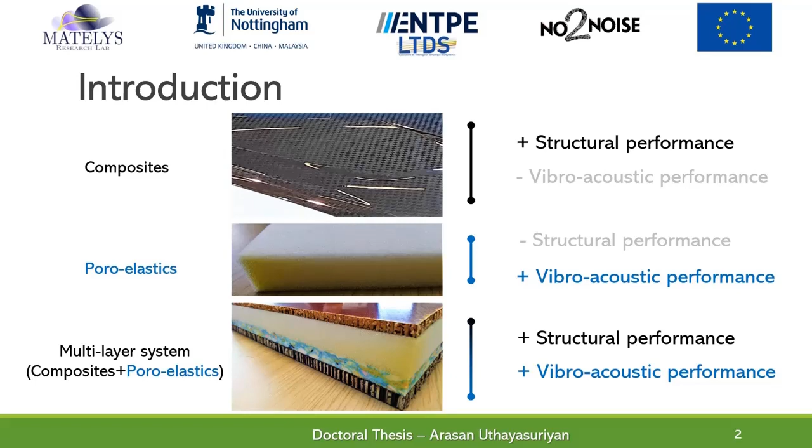By combining these two kinds of materials, we form a multi-layer structure from which we could realize good performance on both aspects. To analyze these multi-layer structures, many types of vibroacoustic models are used, and one such type is called equivalent or condensed plate models, which is the topic of my doctoral research. We will see what these equivalent plate models are and why we use them, what basic details we should know to understand them, what exactly we get from these models, and what process or methodology we follow to get these outputs. That's the first part of this presentation, and after that I'll move on to the four advancements I made during the course of my PhD.

First we'll focus on what these equivalent plate models are and why we use them. To answer these questions, we could look at two important advantages that they provide. Let's look at the first one.

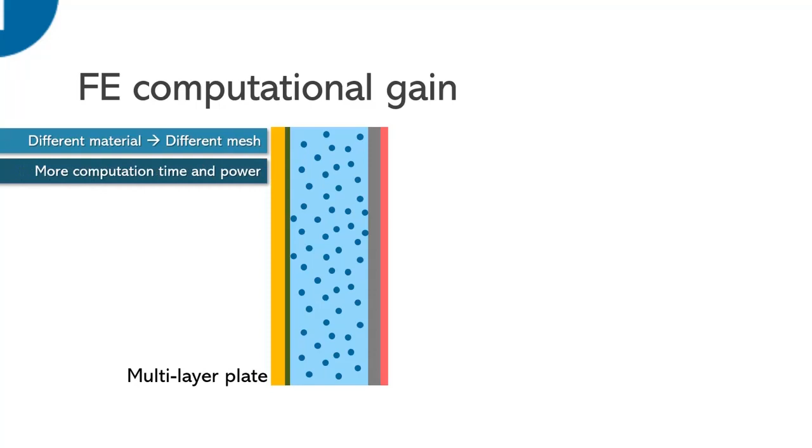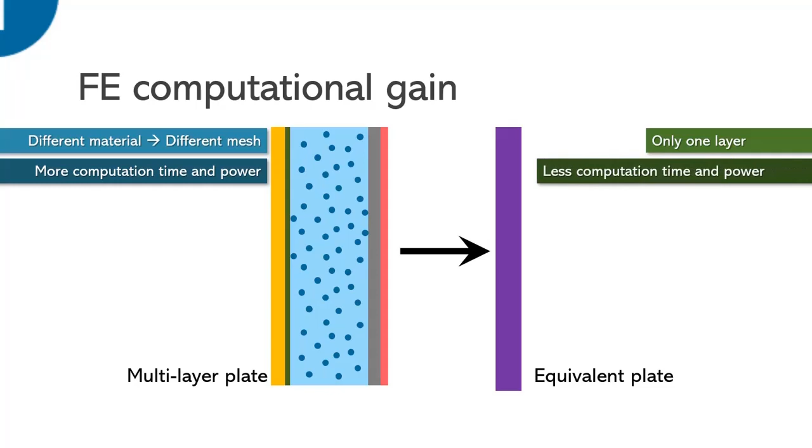We have seen that these multi-layer structures are used to improve structural and vibroacoustic performance, but when we go for finite element computations of these structures, we need different mesh sizes or mesh types suitable for different materials used in the layered structures. Additionally, for an industrial problem like cabin flooring design of an aircraft, if we mesh each and every layer of these structures, it would result in a larger number of degrees of freedom, requiring more computational time and power. Alternatively, if we could convert this multi-layer system into a single layer which would exhibit the same or equivalent vibroacoustic response, we would end up with only one layer of material to handle, helping reduce the total computational time and power for finite element simulations.

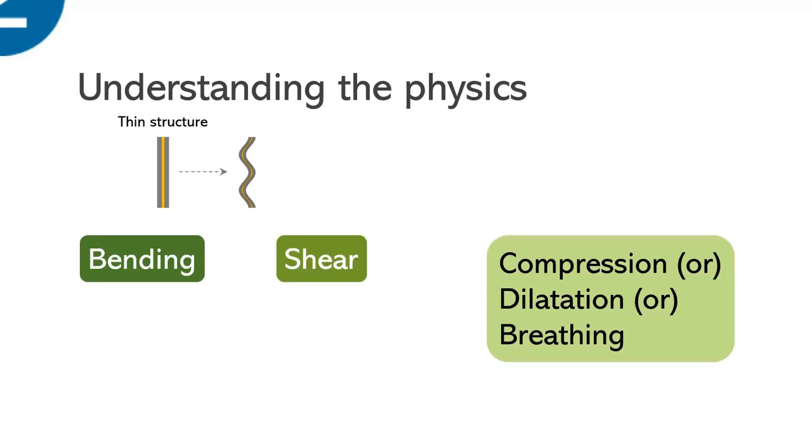Now let's look at another major advantage of these models. Depending on the types of layers used in the multi-layer structures, different kinds of waves could propagate inside the layer, which then contribute to the global response of the structure. If the layers are too thin, we observe that only bending and shear contribute to the global response of the system, and generally these two wave motions are categorized as antisymmetric wave types. On the other hand, if the multi-layer structure is thicker or contains soft materials inside, then along with bending and shear, compressional motion also influences the response of the multi-layer structure.

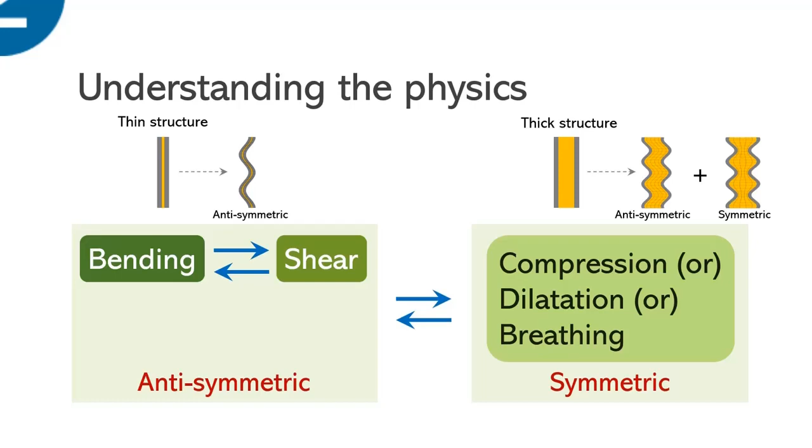Here, the equivalent plate models help us understand the interaction between antisymmetric motions such as bending and shear. For example, at a given frequency, how is this multi-layer structure going to behave? Is it controlled by the bending of all the layers or only some layers, or how do these different motions affect the damping nature of the structure? What are the interactions between the symmetric and antisymmetric motions, and when are they important? This kind of understanding could be obtained from these equivalent plate models, and this information is quite useful while designing multi-layer structures.

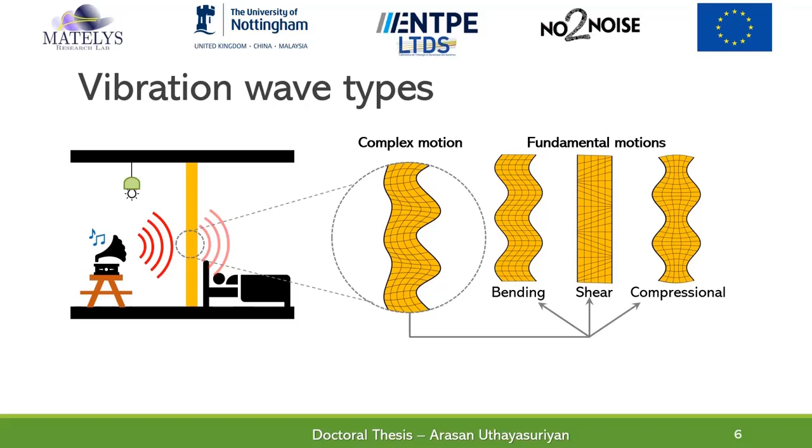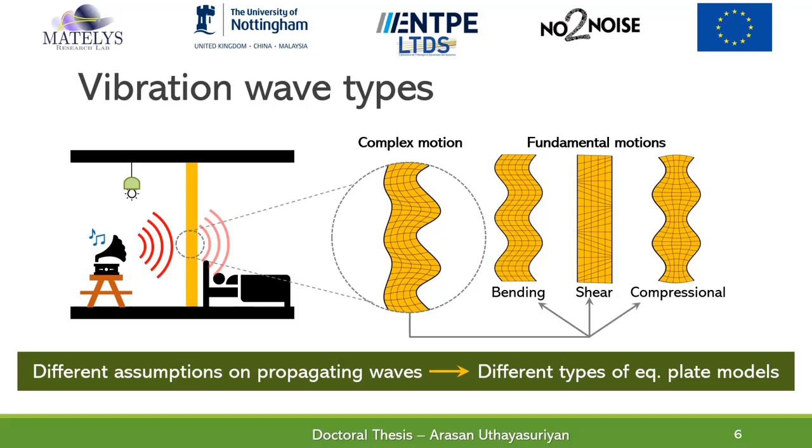There are different equivalent plate models in the literature, but they mainly differ from each other by what propagating waves they allow in each layer of the multilayer system. Why do they allow only a few wave types and not all? It is mainly to reduce the complexity level of the theoretical formulation of the model, thereby targeting only specific problems. So by formulating these equivalent plate models, what do we get as an output?

For this, we will look at three models that are widely used in the literature and industries. In the added stiffness model, only bending wave motion is considered in all the layers of the multilayer system. In another popular model called RKU, developed for three-layer systems, the outer layers are assumed to be controlled only by bending, and the core layer is controlled only by shear.

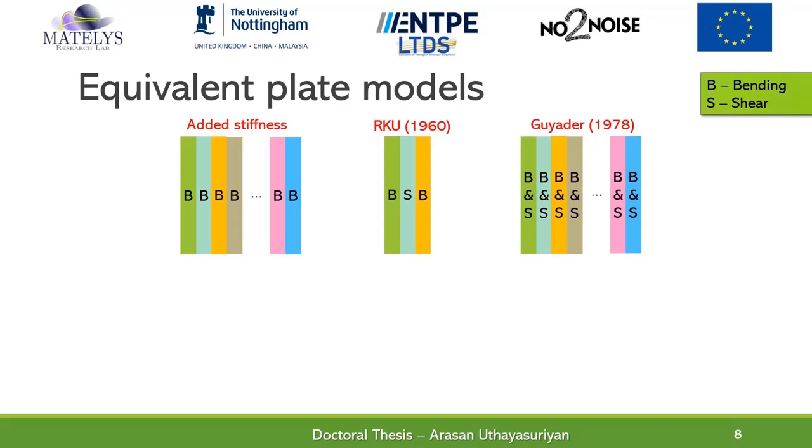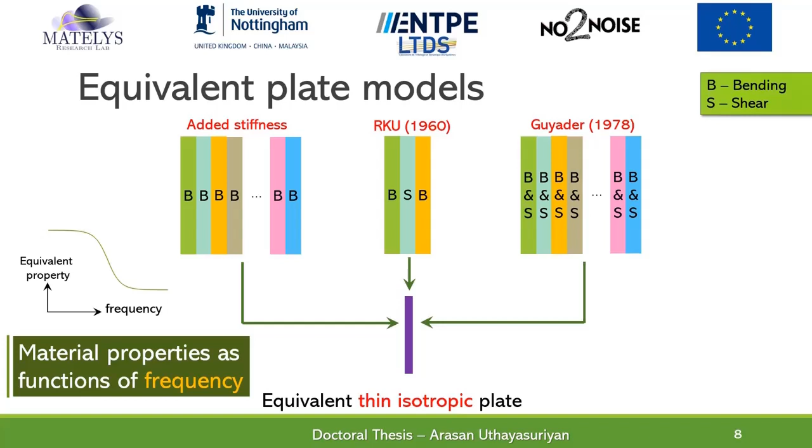The third model, developed by Guyader, allows both bending and shear waves in all the layers of the multilayer structures. All these models convert the multilayer structure into a single isotropic thin plate with frequency dependent material properties such as bending stiffness or Young's modulus, which are given as inputs for finite element calculations. Note that these models exhibit only bending and shear effects of the multilayer structures, and neither includes compressional or dilatational motion in their formulation.

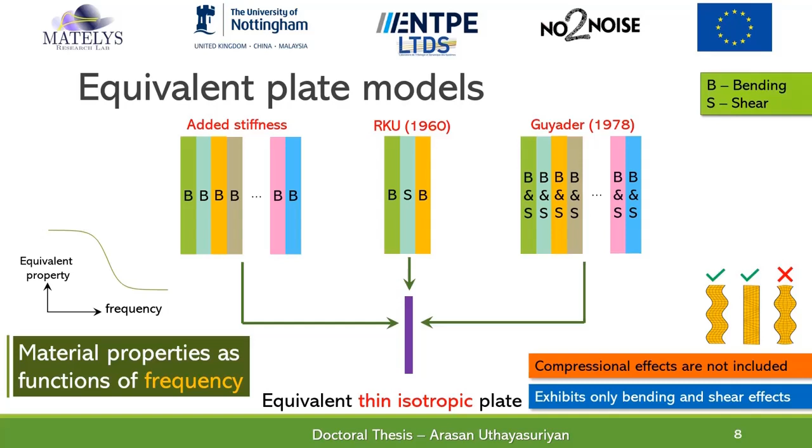Knowing these basics of equivalent or condensed plate models, I now move on to advancements done to improve them. The first is to find the frequency limits of validity of commonly used plate models for vibroacoustic applications. Two types of plate models are commonly used: Love-Kirchhoff and Reissner-Mindlin theories, commonly referred to as thin and thick plate theories, respectively.

Finding these frequency limits of respective theories would be necessary to safely apply them, but there is no clear-cut analytical expression available in the literature which could help us know their validity or accuracy limits. Therefore, as a first advancement, the frequency limits of isotropic single-layer plates are analytically expressed.

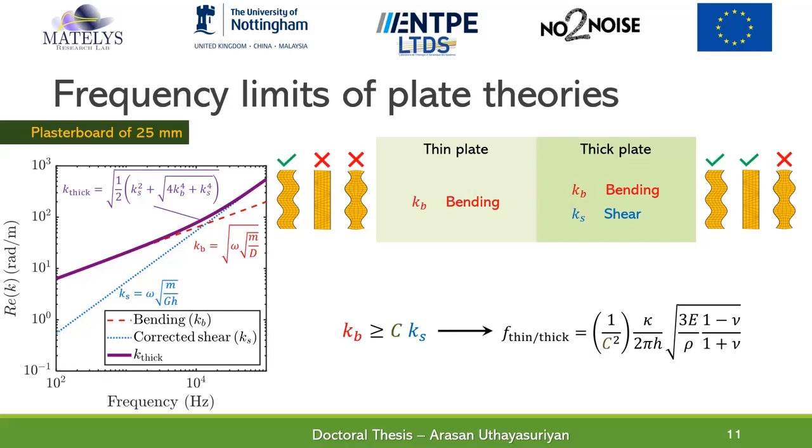As the shear wave number is comparatively lower than the bending wave number in the low frequency range and increases linearly with frequency, we could limit the thin plate theory by defining a ratio C between the bending and shear wave numbers, as shown here. This definition helps us find the analytical expression for the frequency limit of thin plate theory.

For the frequency limits of a thick plate theory, we could compare the propagating waves of a thick plate and an elastic solid.

Note that the principles of elasticity include the compressional motion of the structure along with bending and shear, whereas the plate theories neglect the compressional motion.

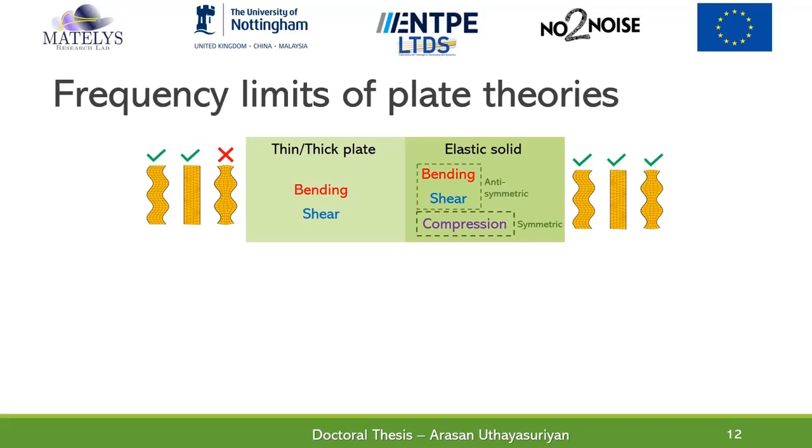For asymmetric multilayers, these expressions would be complex, and those are out of the scope of my thesis.

which actually comes from the transfer matrix method. And from this equation, we could obtain the symmetric admittance of an elastic layer.

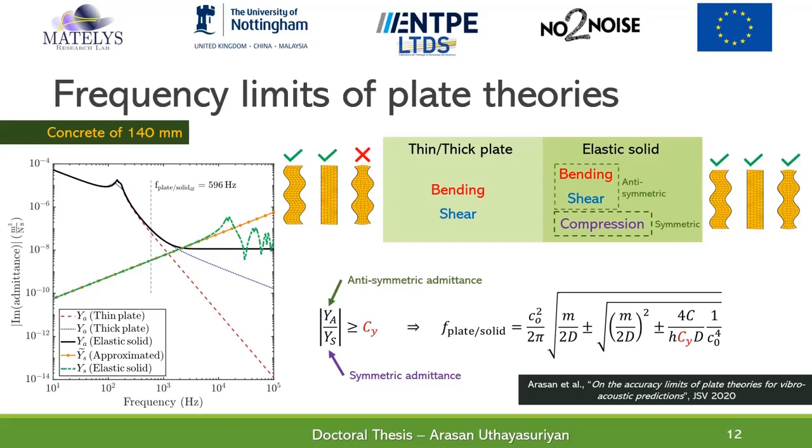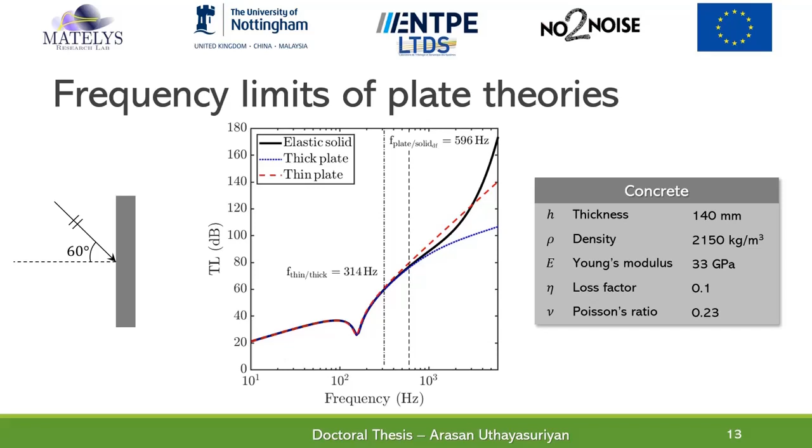So now if we plot the transmission loss for a concrete layer with the mentioned properties, we could observe the well-predictive nature of the frequency limits computed by the analytical expressions that I have shown before.

So to demonstrate the validity of these frequency limits, a dedicated web page has been created in the APMR website. You could find the link for this page in the description of this YouTube video. The web page contains the details that we discussed now.

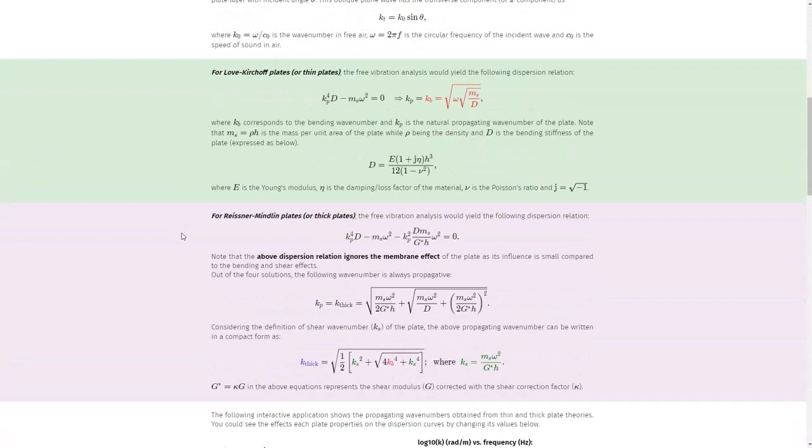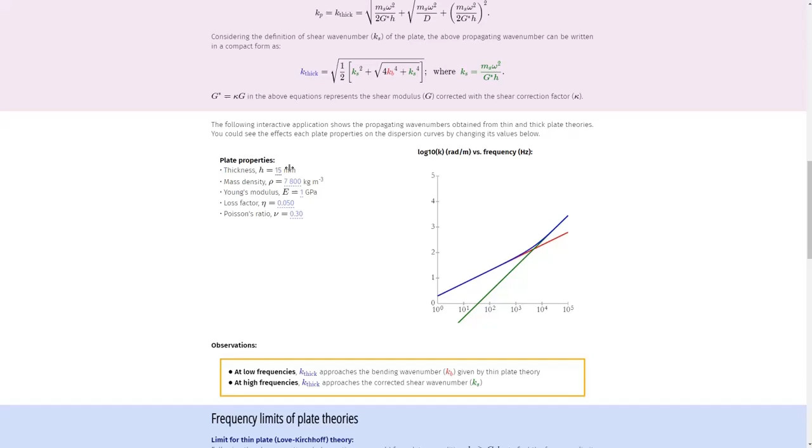So for example, if you want to see the effect of the plate thickness on the wave numbers, you could change the values of the thickness here, and you can observe its effect on the dispersion curves on the right hand side here. So if we scroll down further, you could find an interactive application for the frequency limits

of plate theories. In this application, the transmission loss values are plotted for different theories for the plate properties shown on the left hand side under 60-degree plane wave incidence.

The frequency limits corresponding to the thin and thick plate theories are also plotted with the gray and green color dashed lines respectively. So if you want to see the effect of plate properties on these frequency limits, you can just change a property value and see its effect on the plot.

For example, here if I change the Young's modulus of the plate to 2 GPa, around 2 or 3 GPa, and for this value you could see the instant predictions of the frequency limits and the variation in TL responses from different theories using this interactive application.

Suppose if I change the density to 3000 kg per meter cube, so we can see that the thin plate theory starts to deviate from this frequency, as it does not include

the shear motion of the plate, whereas thick plate theory could match up until this frequency from the TMM, as the compressional motion starts to influence the structure's behavior after this frequency, as you can see here, and the plate theories do not capture this compressional effect in their formulation, which is why you are seeing these deviations after these

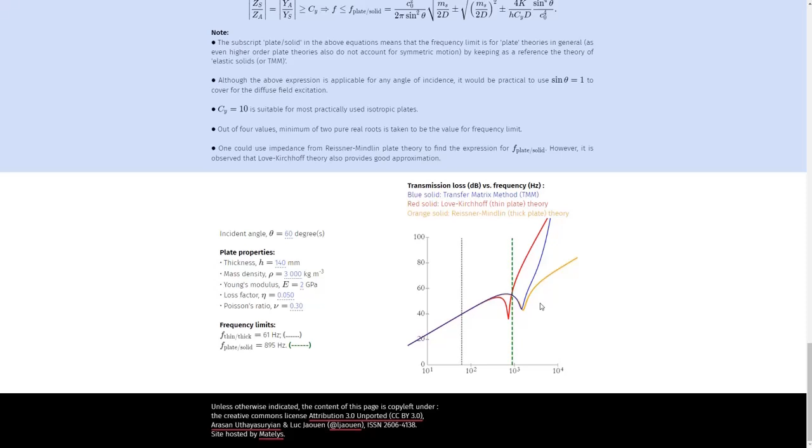frequency limits. Okay, let me get back to the presentation now.

Okay, so the second advancement is regarding the development of a simple equivalent plate model for 3-layer sandwich plates. Among the existing condensed plate models, Guyader and RKU models are widely popular due to their effectiveness to capture the natural response of the multilayer structures into a single layer.

But one of the major challenges with regard to these models is the implementation process, as these models require many complex computations.

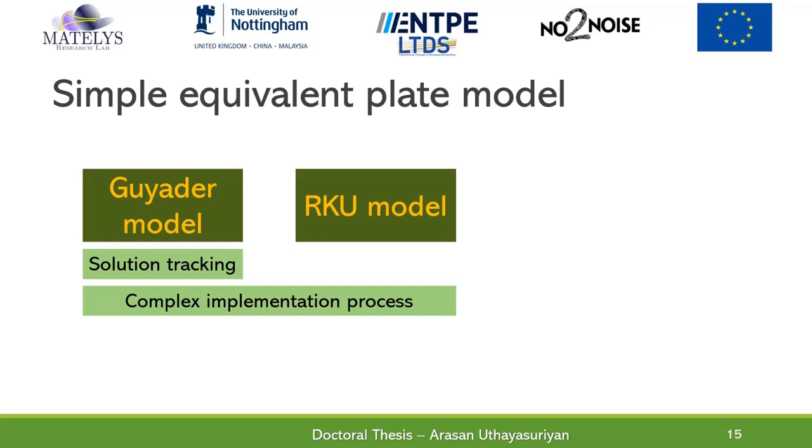Implementing and testing of these models would take considerable amount of time, and in addition, the Guyader model requires solution tracking techniques to be implemented to find the physically propagating wave of the multilayer structure.

So to avoid all these complications, a simple model is developed for three-layer structures from the asymptotic observations made by Boutin and Viverge using their homogenization approach.

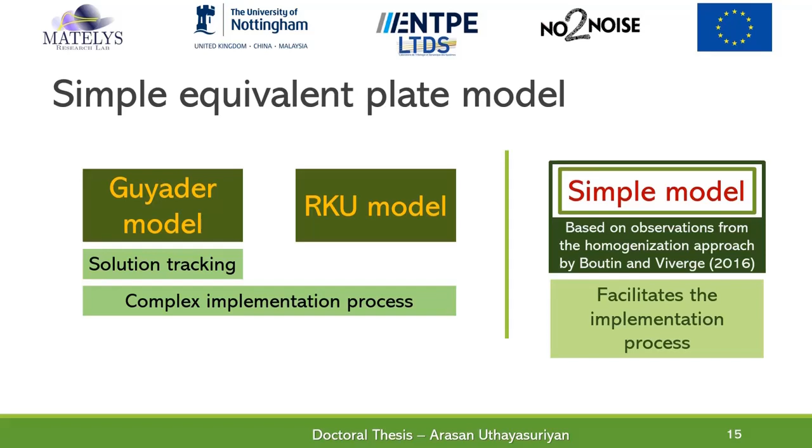So to understand the methodology, let's go back a little and see the wave number plot of a single layer again. We could see that at the low frequency, to put it in other words, we could see that the low frequency asymptote of the propagating wave number is the bending wave number, and the high frequency asymptote is of

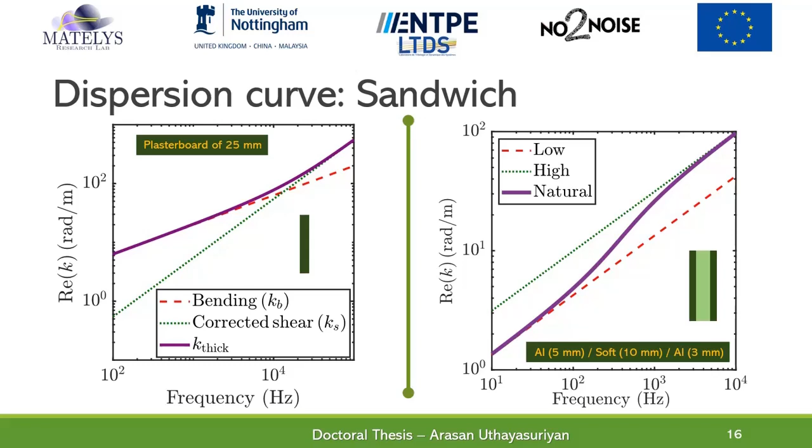the shear wave number. On the other hand, if we see the nature of the propagating wave number for a three-layer sandwich structure, it seems like an S-shaped curve or sigmoid curve, and the asymptotical behavior looks different than the single layer structure. So now let me go a little deeper here.

Instead of the wave number, if I plot the equivalent bending stiffness, we would be able to observe some interesting asymptotical behaviors of the three-layer structure.

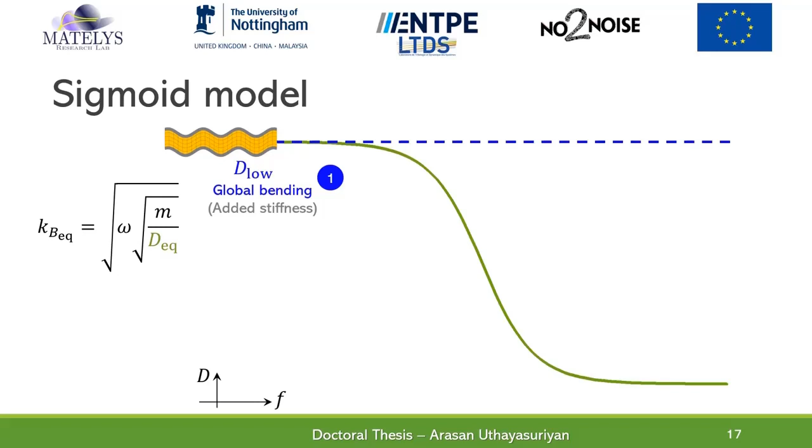At low frequency, the structure bends as a whole, and all three layers contribute to this global bending. At high frequency, the core decouples the skins, and this wave motion is controlled mainly by the individual bending contribution from the skins. Boutin and Viverge call this behavior inner bending in their homogenization work.

At transition frequency, the shear modulus of the core controls the motion of the structure. These are the three important behaviors of a three-layer structure. But to get the values of D_eq, the equivalent bending stiffness, at all frequencies, we would need a fourth

parameter, which is called the slope at the transition frequency. This parameter is influenced by the ratio between the core and the skin thicknesses, and it can be expressed by a polynomial as a function of this ratio.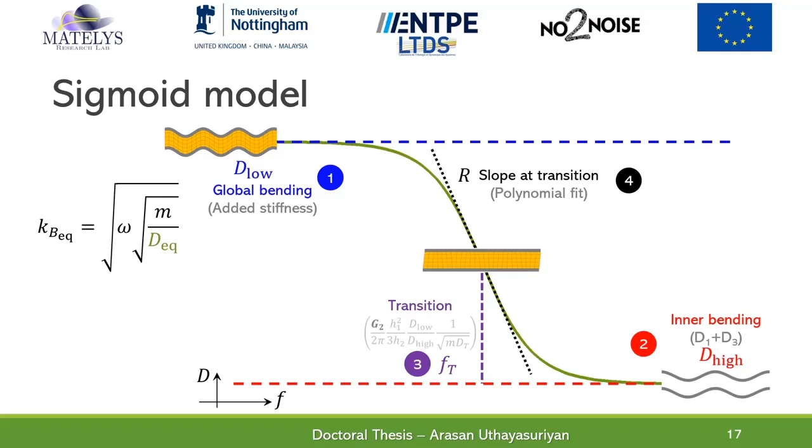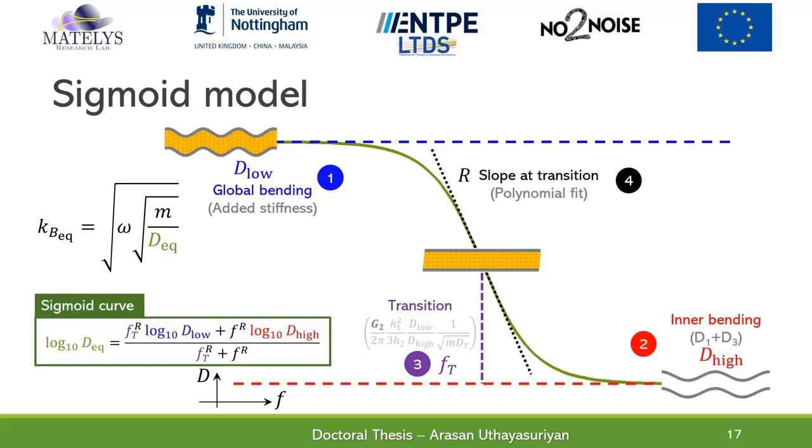So now, with only these four characteristic parameters, a full frequency response can be obtained by this relation I have shown here for the computation of equivalent bending stiffness, which is denoted as Deq here.

So now let us look at a validation case with a three-layer structure with aluminum skins and a soft core, as I have shown here.

At low frequency, an asymptote can be drawn from the bending contribution from all layers. At high frequency, an asymptote can be drawn from the bending contribution only from the skins of the sandwich. And the transition frequency can be computed from the shear modulus of the core layer.

So with this information, we could obtain the full frequency range response as I have shown here, which is in high agreement with the Guyader model.

Therefore, this new simple model could provide the following advantages over other existing condensed plate models. Due to its simplicity, this new model will be easier to implement compared to the other models. For the same reason, it can act as a handy tool to optimize the sandwich layers to achieve the desired performance. And finally, it can be helpful to understand the physical behavior of the sandwich structure at different frequency regimes.

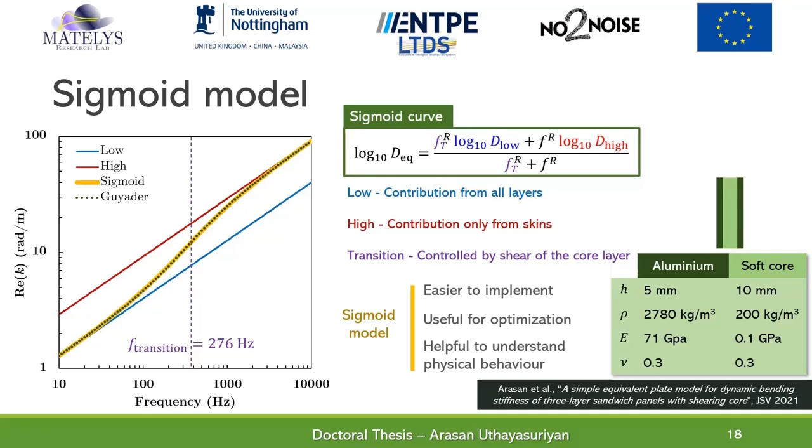Now I'm going to show you another web application for the Sigmoid model.

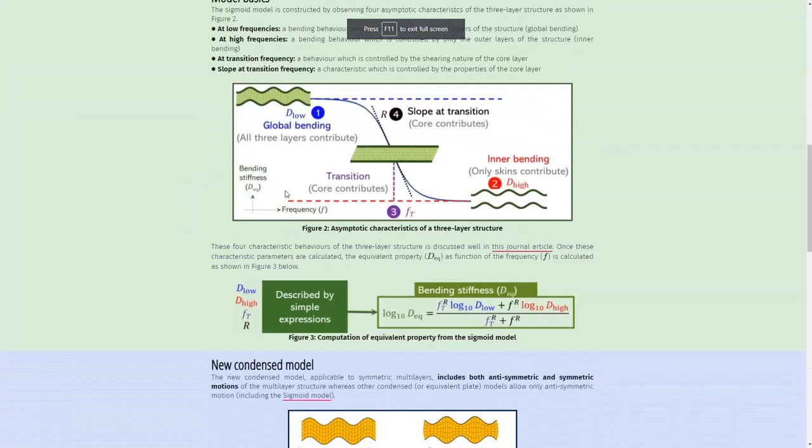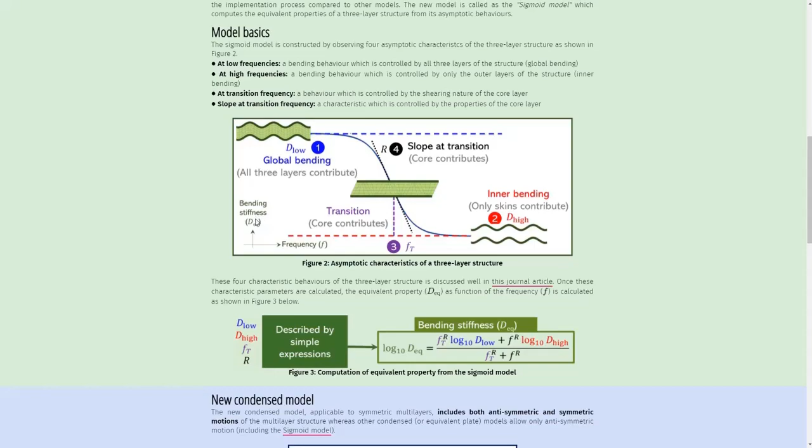As you can see on this web page, the basic details of the sigmoid model are given with some illustrations, and if you scroll down below, you could find an interactive application.

So here I have taken a three-layer structure with steel skins and a soft core, with its properties on the left-hand side. On the right-hand side, the equivalent bending stiffness of this three-layer structure is plotted along with low

and high frequency asymptotes. So if I change the Young's modulus of the core, we could see that it mainly affects the position of the transition frequency and not the other characteristics of the bending stiffness profile.

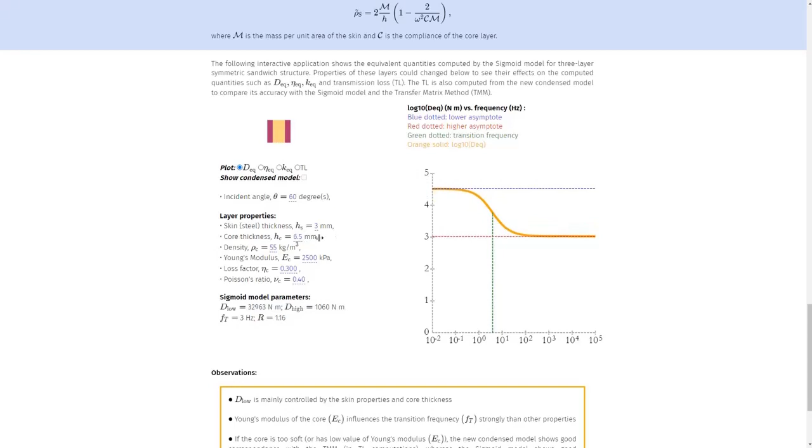But if I change the thickness of the core, we could observe that it affects the lower asymptote as well as the transition frequency. We could also see the effect of these properties on the equivalent loss factor.

For example, we could see that as I change the Young's modulus of the core, the frequency position of the peak loss factor changes, and its peak value is heavily controlled by the loss factor of the core, as you can see from changing its value.

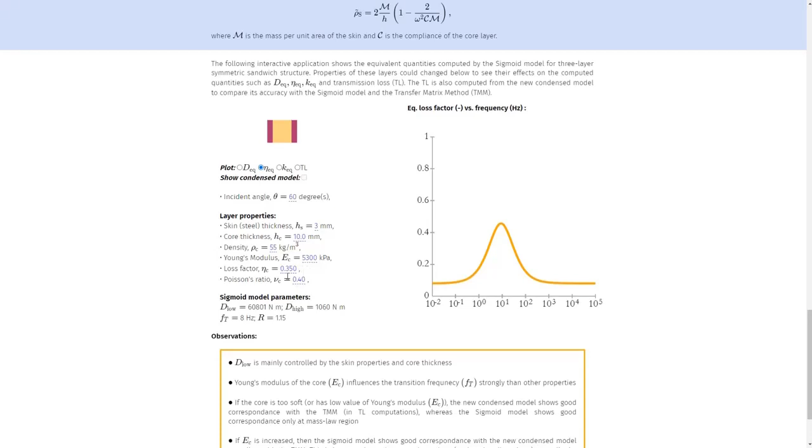So we have seen how equivalent plate models behave for sandwich structures, but are these models sufficient enough to completely describe the vibroacoustic behavior of the multilayer structures?

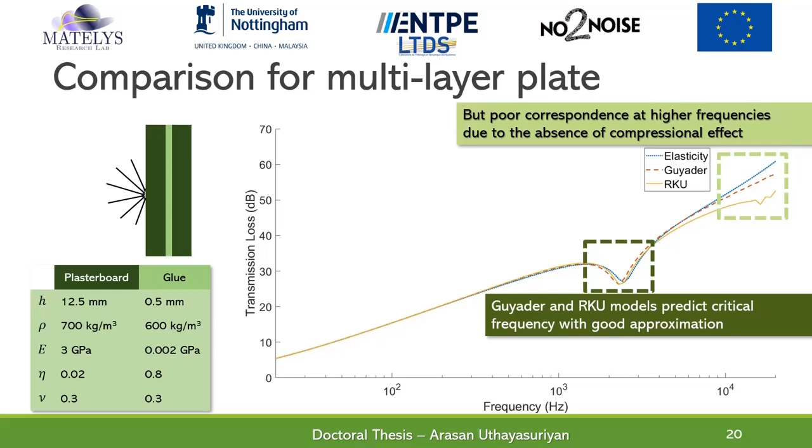This particular point can be supported by performing the Lamb wave analysis as well. In short, Lamb waves are elastic waves that propagate in the structure, and these waves are considered to be complete as they arise from solving the complex elasticity equations.

Here I have presented the zeroth order antisymmetric and symmetric Lamb wave solutions for both stiff and soft core configurations. I would like to stress that the antisymmetric wave corresponds to the bending and shearing motion of the structure, whereas the symmetric wave corresponds to the compressional or dilatational motion.

As we could see from this plot, the Guyader model predicts the correct antisymmetric wave solution, but is unable to predict the wave solution corresponding to the symmetric motion. This could particularly lead to erroneous results if the core is too soft, because the compressional mode also contributes to the complete vibrating motion of the structure after a certain frequency.

So therefore, a new condensed model is developed which includes compressional motion along with the bending and shear motions of the multilayer system. Okay, now let's see the methodology of this new condensed model.

Including the compressional motion along with the bending and shear would normally be tricky, but in the case of symmetric multilayers, we could draw inspiration from the work done by Dym and Lang, where they demonstrated that we can decouple the symmetric and antisymmetric motions, and express the behavior of these two decoupled plates in a separate manner.

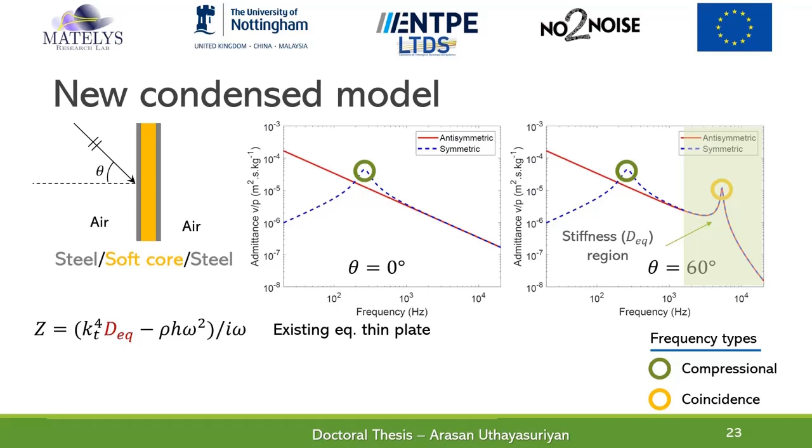So in our present case, we have decoupled the single layer condensed plate into two equivalent thin plates, and since both symmetric and antisymmetric admittances have the same peak, which is controlled by the bending stiffness, we could keep this term common for both of these impedances.

We also note that for different incidences, this shaded region is identical and it is controlled by the mass term of the impedance.

Although the region is identical at different angles, the nature of the symmetric and antisymmetric admittances are in fact different. As you can see, the antisymmetric admittance decreases with frequency, whereas the symmetric admittance increases and has its peak around 200 Hz and then decreases with frequency.

Therefore, two different mass terms are introduced for each impedance like this, and it may also be noted that at normal incidence, the entire region is actually controlled by the mass, as the contribution of the stiffness is zero at normal incidence.

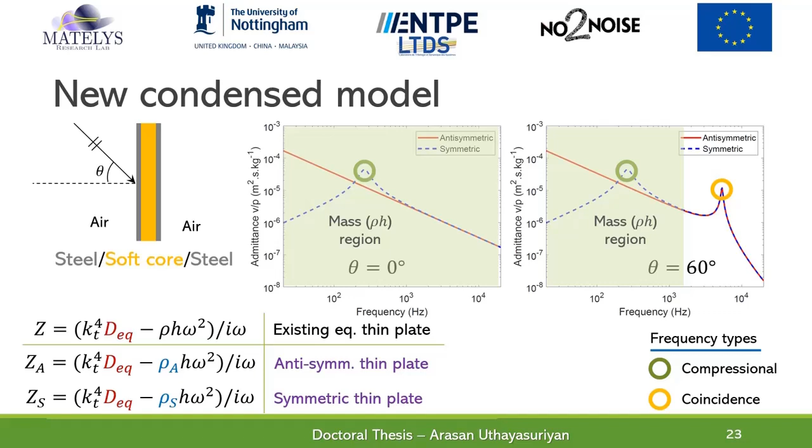So in a generic symmetric multilayer system, we could express the impedances of these two decoupled equivalent plates as I have shown here, with the frequency dependent properties d-equivalent, rho-a and rho-s. Okay, so how do we compute these properties?

d-equivalent is usually taken from any existing equivalent plate models, or the simple equivalent plate model that we saw a few minutes before for the 3-layer structure. To obtain the frequency dependent properties rho-a and rho-s, two approaches are proposed. The first one is a more generic way where the impedances are computed at normal incidence using the transfer matrix method, or shortly called TMM, and then from these impedances rho-a and rho-s are obtained.

So to demonstrate the second approach, a symmetric 3-layer structure is taken where the skins are assumed to act as a mass, and the compressional stiffness of the core is modeled as a spring.

For this mass spring mass system, we assume rho a to be the equivalent or the average density of the structure, and rho s is expressed as shown, which has the effect of the symmetric motion or compressional motion of the 3-layer structure through the spring stiffness k.

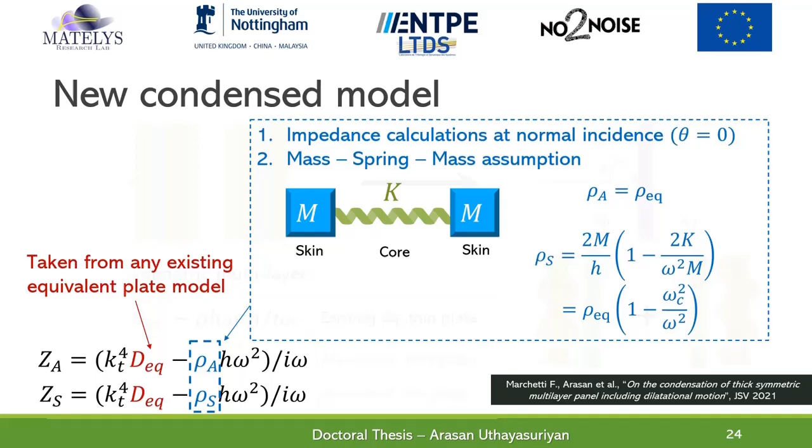Even though I show this approach for the 3-layer system here, it can be extended to any number of layers. We should also keep in mind that these three dynamic properties do not depend on the angle of incidence, and therefore they can be called the intrinsic or characteristic properties of the multilayer structure.

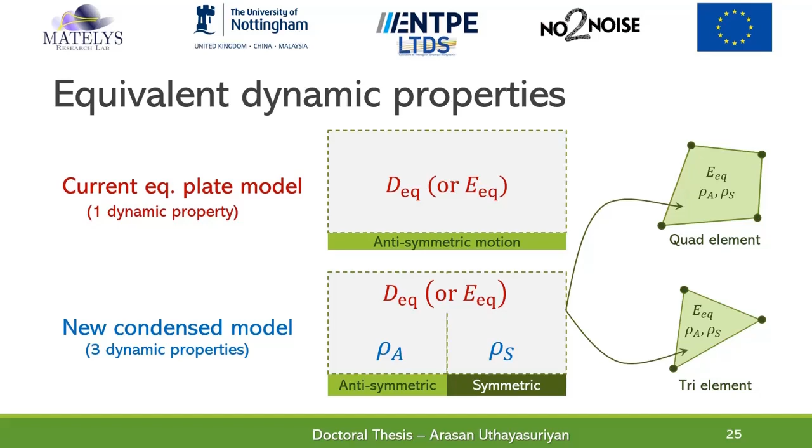In summary, the existing equivalent plate models require only one dynamic property, which is dEq, while the newly developed condensed model requires three dynamic properties: dEq, rho a and rho s, to capture both antisymmetric and compressional motion of the multilayer structure. We could find the equivalent Young's modulus Eq from the equivalent bending stiffness, denoted as dEq. This equivalent Young's modulus would go as an input in the finite element calculations to compute other vibroacoustic quantities.

So to show the validity of this model, a sandwich structure with steel skins and soft core is taken and subjected to diffuse field excitation.

Here I have chosen diffuse field to demonstrate the intrinsic nature of the condensed properties dEq, rho a and rho s. As a reference, a transmission loss computed from the full elasticity solution or the transfer matrix method is shown here. Note that we could observe two sudden drops in TL from this curve.

And these are from the resonance due to the compressional and critical frequency effects respectively. Now, if we plot the antisymmetric contribution from any existing equivalent plate model, we get a response like this, and we could clearly see the deviated or erroneous response from this model after 100 Hz.

Though the current equivalent plate model predicts the correct critical frequency compared to the elasticity theory, it underestimates the TL response of the multilayer structure at this frequency. Further, we could clearly see that the current equivalent plate model misses predicting the compressional frequency effect in the TL, as it does not contain compressional motion in its formulation.

Now, if we plot the response from the newly developed condensed model, we could see that it correctly captures the vibroacoustic performance throughout the frequency range by including both symmetric and antisymmetric motions of the structure.

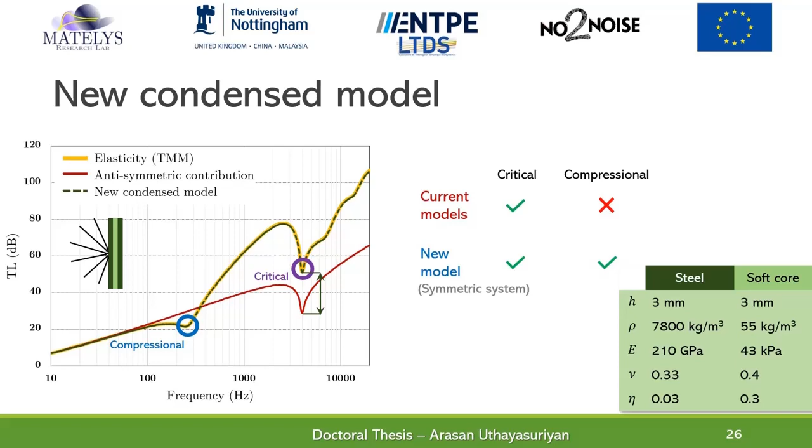Okay, now I'll show the validity of the new condensed model using the web application.

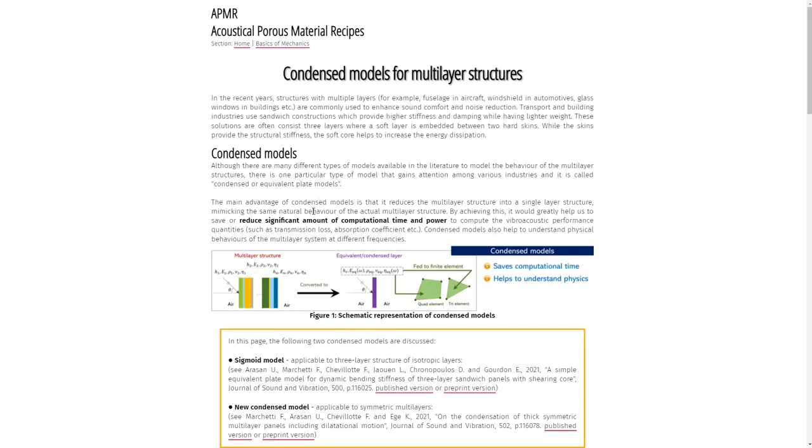So you can see the interactive application for this part on the same condensed model web page itself by clicking the TL option here.

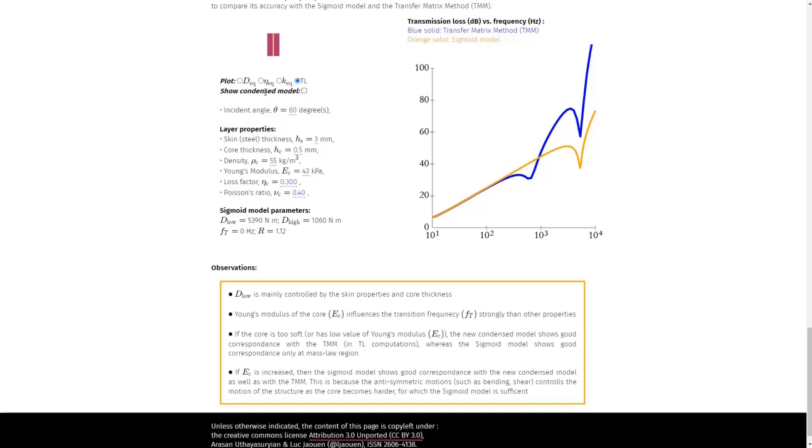But if I show the condensed model now, you can see that the new condensed model captured this motion very well and thereby has good correspondence with the reference solution obtained from the TMM.

You could note that the core is too soft compared to the steel skins, which easily allows the compressional motion at low frequency. As I increase the Young's modulus of the core, it slowly becomes stiff for the compressional effect, and therefore both the new condensed model and the TMM match with the equivalent plate model, right?

So this means that only antisymmetric motions such as bending and shear influence the structure behavior for these kinds of multilayer properties. As we reduce the Young's modulus of the core, we could see the evolution of the compressional motion's influence in the TL computation, which is very well captured by the new condensed model.

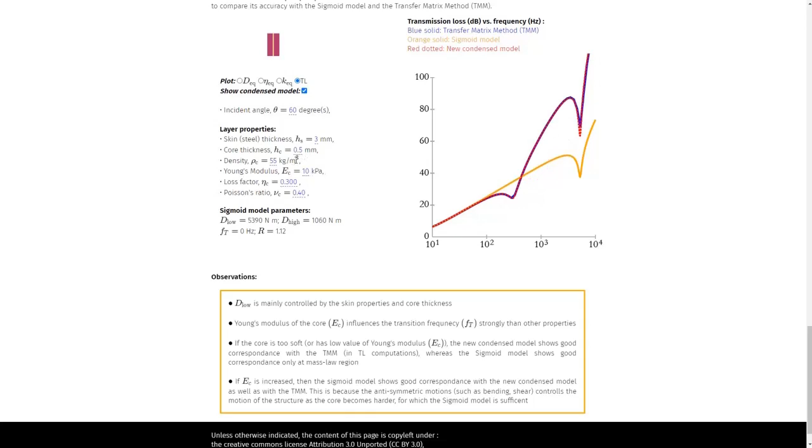Okay, let me get back to the presentation.

Now it's time to implement this newly developed condensed model into the finite element formulation to realize the benefits on the total computational time.

We know that for a multilayer like this, we need to keep only the condensed layer with the dynamic properties E eq, rho A and rho S. In our FE implementation, we modeled this condensed layer with thick plate elements instead of thin plate elements.

Now, you could ask, how can you model with thick plate elements while the condensed models are based on thin plate theory? Because if you remember, we used the thin plate impedances to get the dynamic properties of the condensed layer. Then why did we go with thick plate elements instead of thin plate?

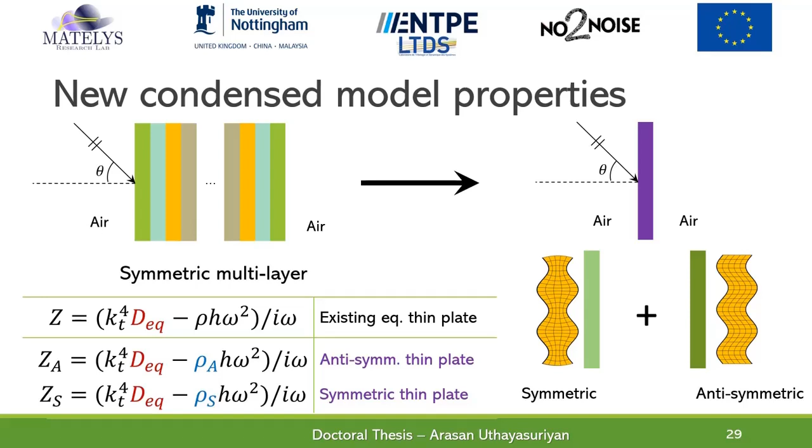The main challenge with thin plate elements is they require special shape functions which should offer non-zero higher order derivatives. This particularly leads to a complex implementation process, and additionally, if you want to run the simulation with higher order elements, we need another set of special shape functions which are even more complex.

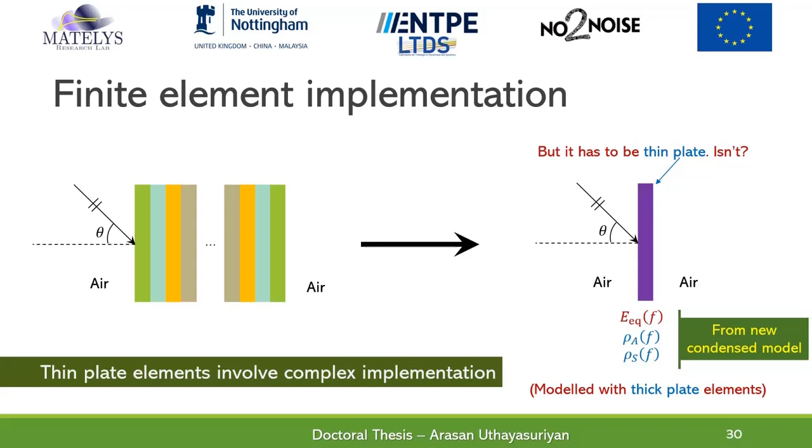So therefore, to avoid this, we model the condensed layer with thick plate elements, which has two different parts in the stiffness matrix definition. We have a bending part KB and a shear part KS, and these element stiffness matrices can be easily obtained by the standard isoparametric shape functions.

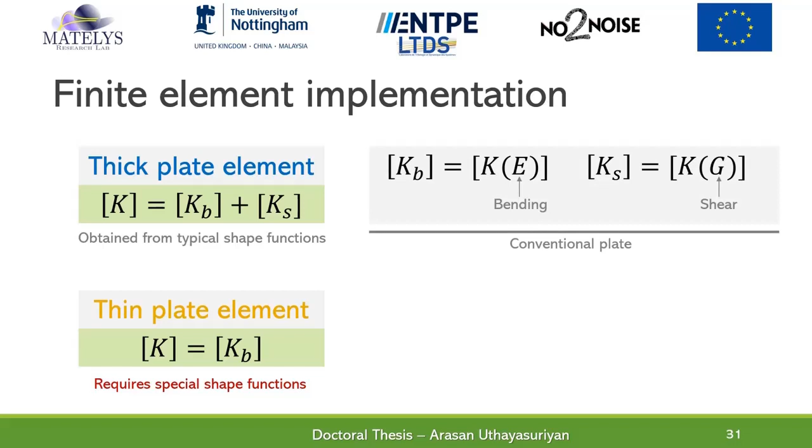For a conventional plate, bending and shear information would be described by the Young's modulus and shear modulus respectively. But in the case of a condensed or equivalent plate, both bending and shear information are condensed into the equivalent Young's modulus. This means that we cannot account for the shear again through the KS matrix, and we need to somehow remove its influence.

So we cannot simply make the shear stiffness zero, as we need both KB and KS as non-zero matrices to be able to solve the problem with the thick plate elements.

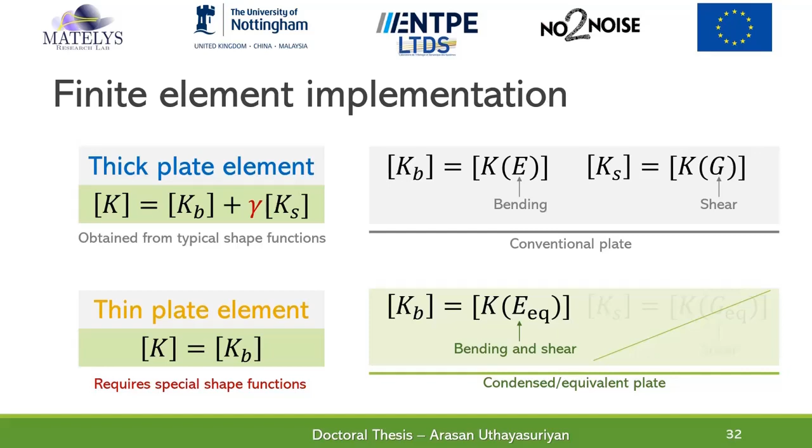But if we introduce a penalty factor, gamma, on the shear part, we could observe an interesting point. If I increase the value of the penalty factor, we could observe that the thick plate response is actually very much closer to the thin plate response. We could exploit this interesting behavior of the thick plate elements to retrieve the behaviors of the thin plate elements without going through all the hassles of implementing special shape functions.

So with this observation, we are now confident to use the thick plate elements with the penalty factor on the shear part to model the condensed layer.

Now let me quickly revise the standard finite element equation formulation to solve the vibroacoustic problem with the elastic solid layers.

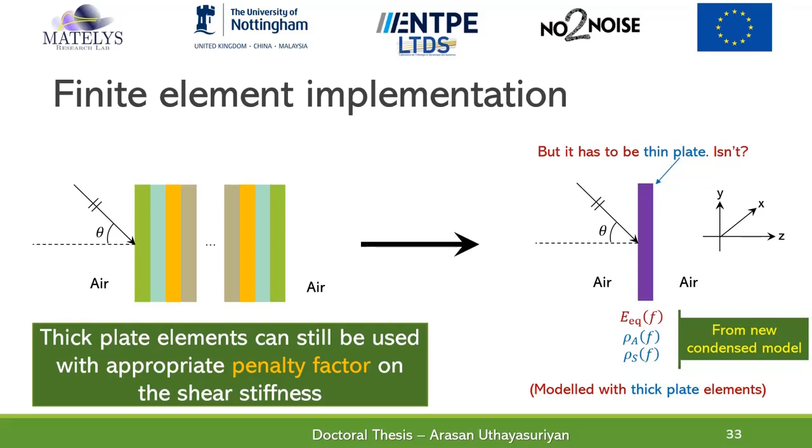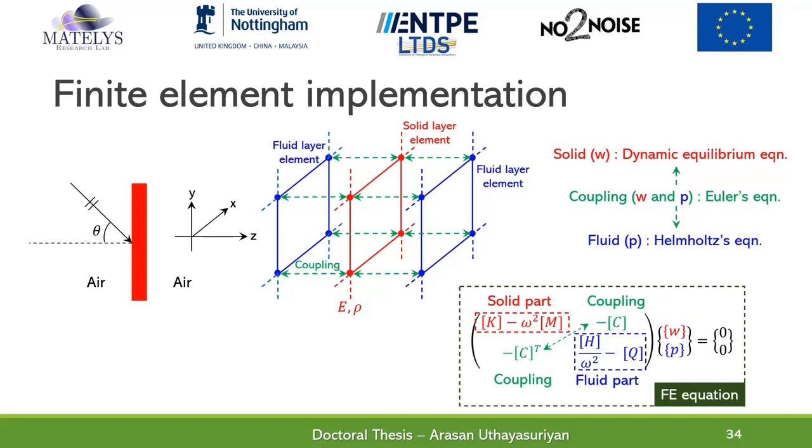The solid layer would be described by the displacement variable W to satisfy the dynamic equilibrium equation. The surrounding fluid layer would be described by the pressure variable P to satisfy the Helmholtz equation. Then the fluid and the solid layer would be coupled using Euler's equation. Following this scheme, we could form a standard finite element equation to solve the vibroacoustic problem.

Note that as I would be solving the problem to compute the transmission loss with an imposed pressure field on the left hand side, there is no loading condition given on the FE equation.

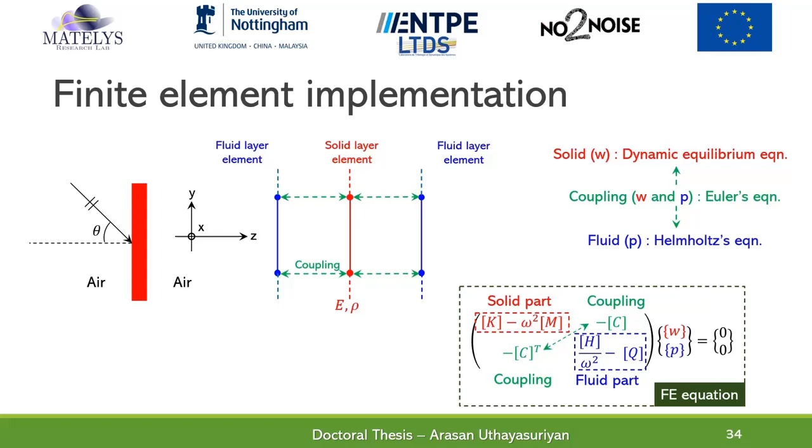Now I'll switch from 3D to 2D view for the sake of simplicity. Okay, so I think it's much clearer now. Now I'll talk about how the new condensed model is implemented into this framework.

If you remember, we have decoupled the condensed layer into two layers corresponding to antisymmetric and symmetric motions. Therefore, in the finite element setup also, we have two plates: one described with antisymmetric displacement WA, and another plate described with symmetric displacement WS. So now to solve this system, we have to couple these two plates.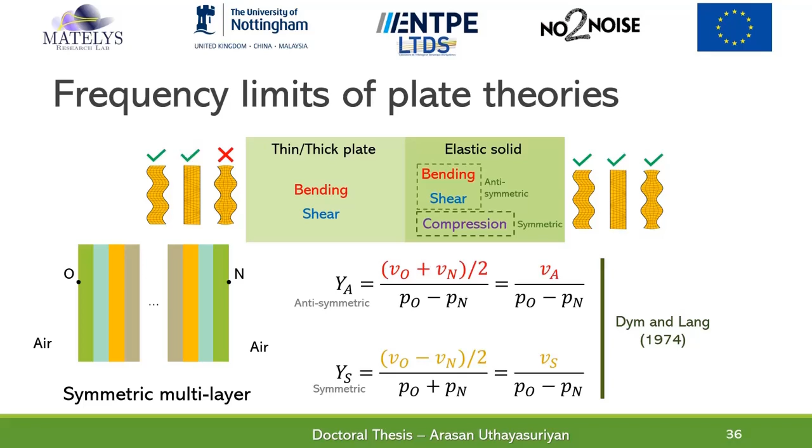For achieving this, we are going to refer to the work done by Dym and Lang again. Let me go back to the place where I introduced the Dym and Lang work to get the frequency limits of plate theories. Using these antisymmetric and symmetric velocity definitions as functions of velocities at the emission and reception side, we would be able to couple the antisymmetric and symmetric plates.

And for this purpose, the pressure degrees of freedom at points O and N are split for convenience. As we have seen before, the plate displacements, WA and WS, are coupled with the fluid layer's pressure degrees of freedom PO and PN using Euler's equation.

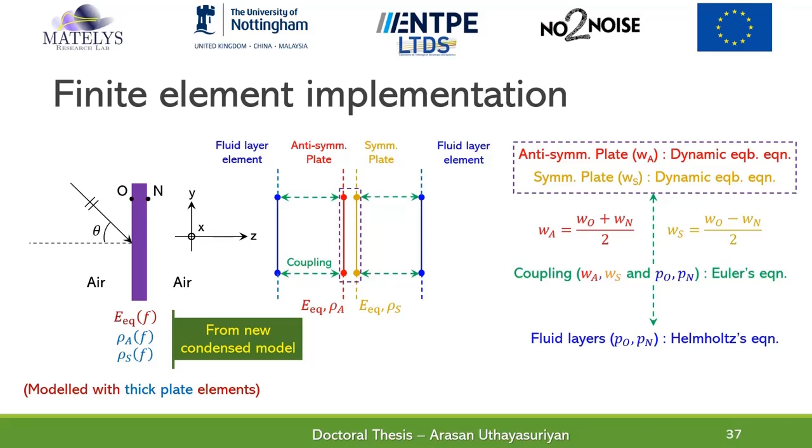So now this scheme is translated into this FE equation, where the dynamic equilibrium equation of the antisymmetric plate is written with Ka and Ma with the equivalent properties Eeq and rho A. In the next row, the dynamic equilibrium of the symmetric plate is written with Ks and Ms with the equivalent properties Eeq and rho S.

Then the displacements WA and WS are coupled with the pressure degrees of freedom PO through the coupling matrix C, using the relations between WA and WS as functions of displacements at points O and N.

Similarly, the pressure degrees of freedom at point N is coupled with the displacements WA and WS in the same manner as before, using the coupling matrix C.

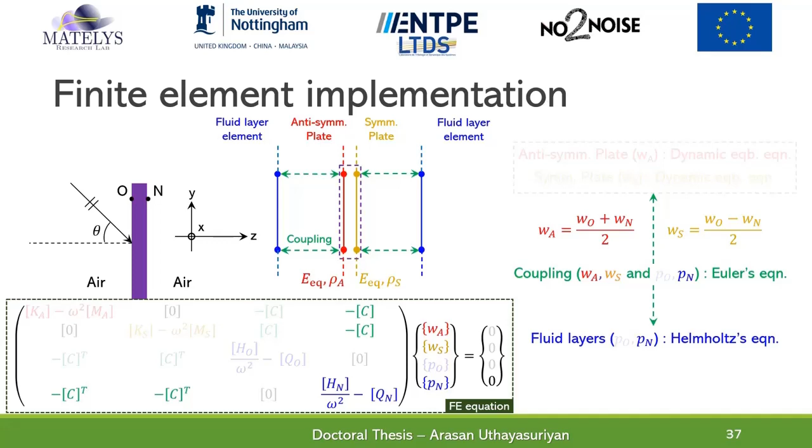So to compare the finite element results with the TMM, the structure is assumed to be of infinite extent along the lateral directions. This could be achieved by applying periodic boundary conditions on the lateral edges of the domain.

To compute the transmission loss, the ratio between the incident and transmitted power needs to be calculated. Once we solve the system, the surface impedance of the condensed layer can be calculated, from which the reflection coefficient can be obtained. The incident pressure is then computed with the reflection coefficient, and from this incident pressure, we would be able to calculate the incident power.

As we could get the pressure and velocity profiles at the reception side after solving the finite element equation, the transmitted power would be calculated with these profiles.

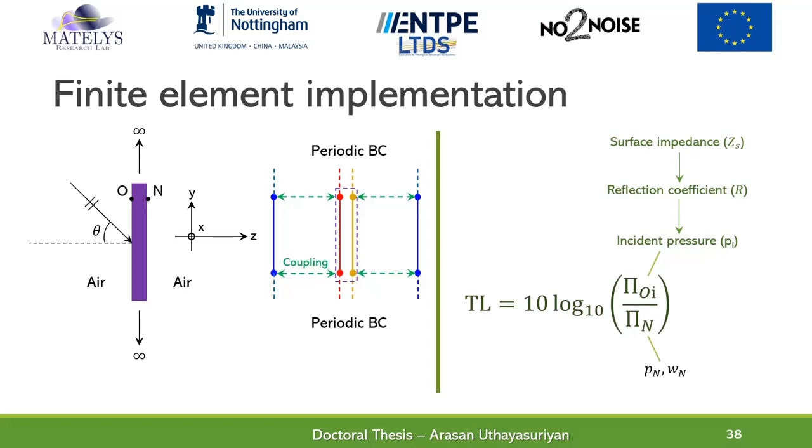Let's see the second configuration now, where a double wall partition case is taken. In this typical double wall construction, a glass wool porous layer would be decoupled from the plasterboard skins with some air gap, typically around 1.5 millimeter.

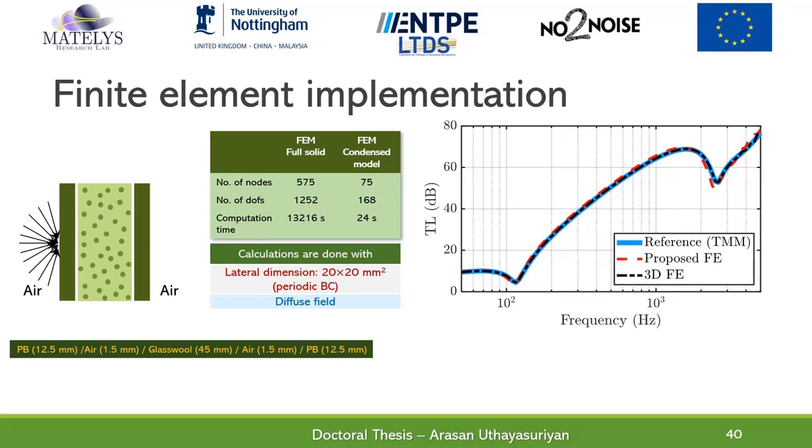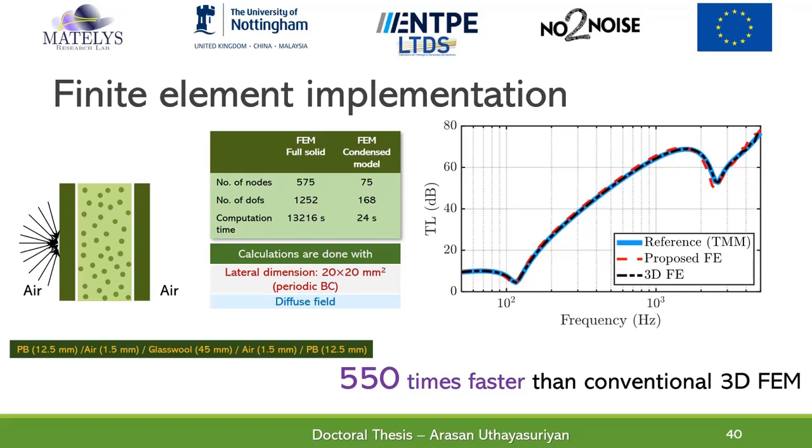For this configuration as well, we could see that the proposed FE approach exhibits good correspondence compared to the reference solutions. On the computational time, we see that the condensed FE scheme takes 550 times lesser computational time than the conventional 3D finite element, which is a significant benefit that we could get from the condensed models.

Alright, so now I have reached the end of this presentation. In summary, there are 3 advancements that I had done during my PhD. At first, the frequency or validity limits of commonly used plate theories are obtained. Those are clear-cut analytical expressions

which depend on the geometric and mechanical properties of the single layer structure. These expressions would be quite useful to many vibroacoustic models, including the equivalent plate models, but they are not applicable to layers with dynamic properties at the moment.

Secondly, a new simple equivalent plate model is developed for 3-layer structure using the observations made from the homogenization approach by Boutin and Viverge. The model is simpler than the other equivalent plate models, and therefore we could benefit from the quicker implementation time. Also, this model would be a handy tool to understand the physical behavior of the sandwich structures. On the downside, it covers only thin 3-layer structure with a soft core.

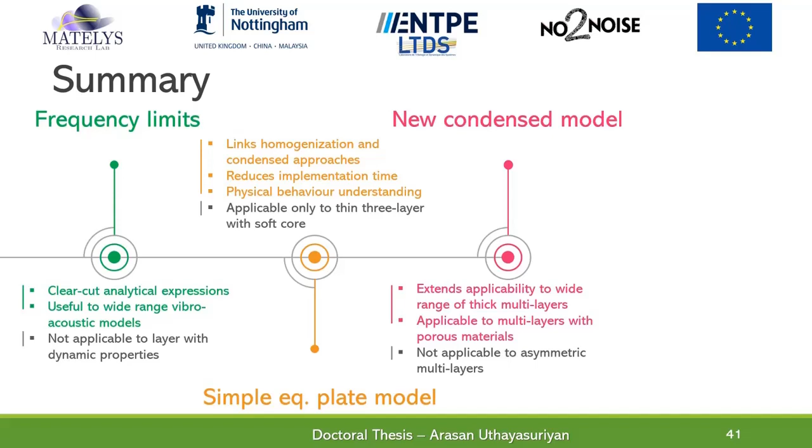Although the equivalent plate models are efficient to reduce the computational time and helpful to understand the physical behavior of the layered structures, they are mainly restricted to only thin structures. Therefore, a new condensed model is developed which extends its applicability to a wide range of thin and thick multilayers, and it can also be applied to multilayer sound packages with poroelastic layers. But it requires the structure to be physically symmetric.

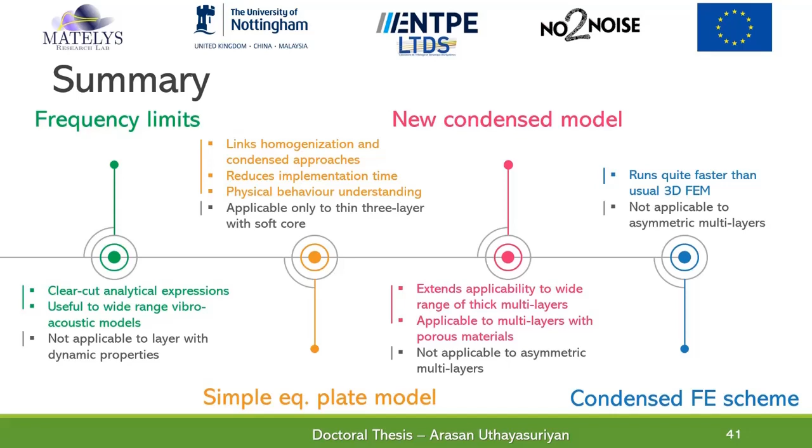And finally, the new condensed model is implemented into the finite element framework to realize the benefits the new condensed model provides to the users. As the condensed model is limited to only symmetric structures at the moment, the finite element approach is also limited to the symmetric structures.

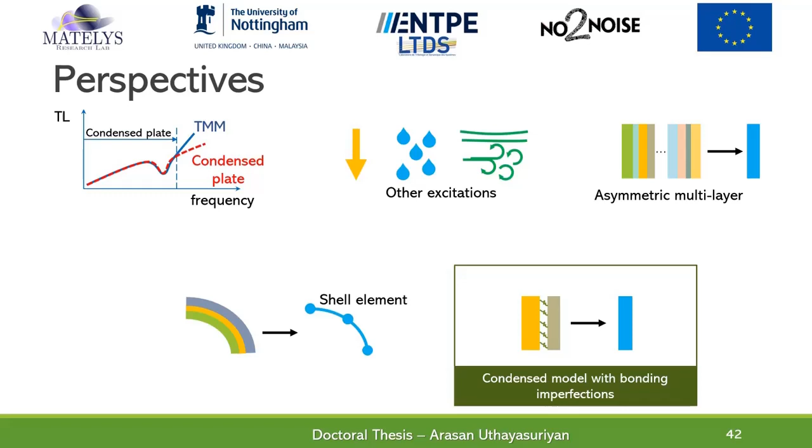Out of the 4 presented works, 3 have already been published, and the one on the finite element implementation is currently with the Journal of Sound and Vibration.